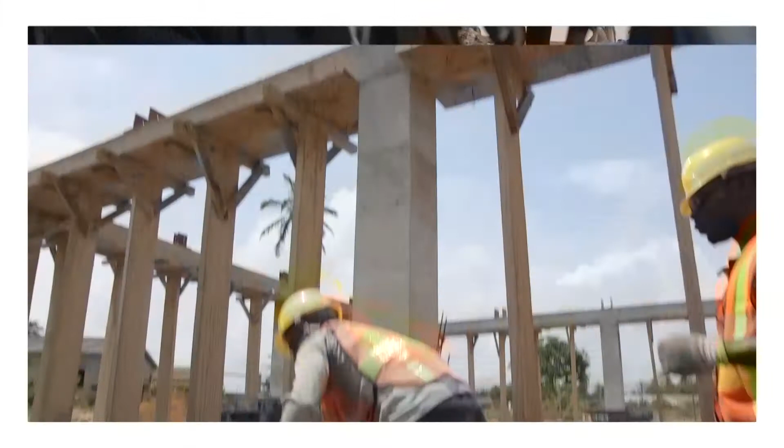The community-based approach does not end when construction finishes. The last stage, maintaining a safer school, is ongoing. Previous stages of safer school construction included participation and training opportunities with the community. Often, this community engagement leads to the community changing its views on hazards and committing to building safer schools.

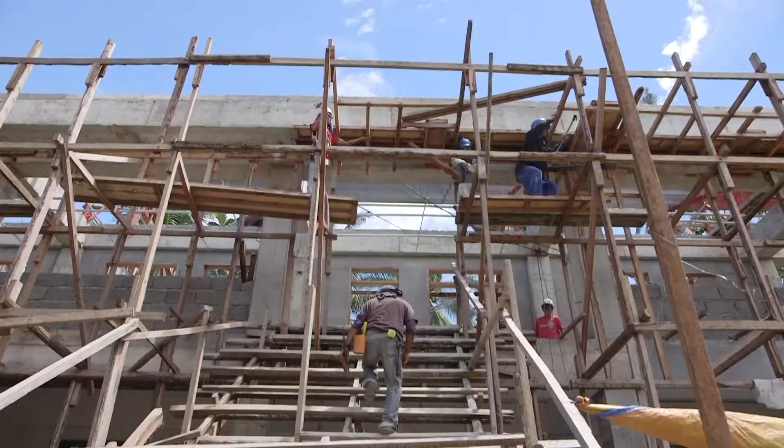Stage 5 is where this changing view on hazards and safety spreads to other parts of school life and community. When the community learns about hazards and works together to remove unsafe conditions, and when the community values safety as a goal for their children and for themselves, they begin to create a culture of safety. With support from the program manager, the community grows this culture of safety even after school construction ends.

They do this by maintaining the school, applying a safety culture to other parts of their lives, and passing on lessons learned to future generations. If implemented well, Stage 5 has the biggest long-term impact. There are 3 steps in the maintenance stage.

Step 1, develop a school use manual and maintenance plan. Step 2, celebrate completion and integrate safety. Step 3, promote broader responsibility. These steps make sure safer school construction becomes the norm. They ensure the community continues to learn from hazards and reduce their risk. Step 1, develop school use manual and maintenance plan.

As construction finishes, the program manager and school management committee focus on the safe use and maintenance of the school. They first work with the design team to write a user manual, a document that lists how the school can and cannot be used safely. Government policies may require particular safe uses of the school, so government agencies may help write the manual.

Perhaps the school is designed to be a temporary community shelter during disasters. This is written down in the user manual. If the school foundation is only strong enough to support 2 stories, this is also written down. The school management committee needs to know what changes they can safely make without seeking approval.

Changes such as painting, replacing windows, or planting vegetation may all be acceptable, but other changes, like adding doors or removing columns, might weaken the school building. These changes need approval from an engineer. The school management committee needs to know this before the school is handed over to the community.

All these permitted uses and changes, along with those that are not, are included in the use manual. The final design drawings are also included. But that is not all. A safer school needs a maintenance plan. The program manager helps school staff and the committee to understand that maintenance keeps schools functional and safe.

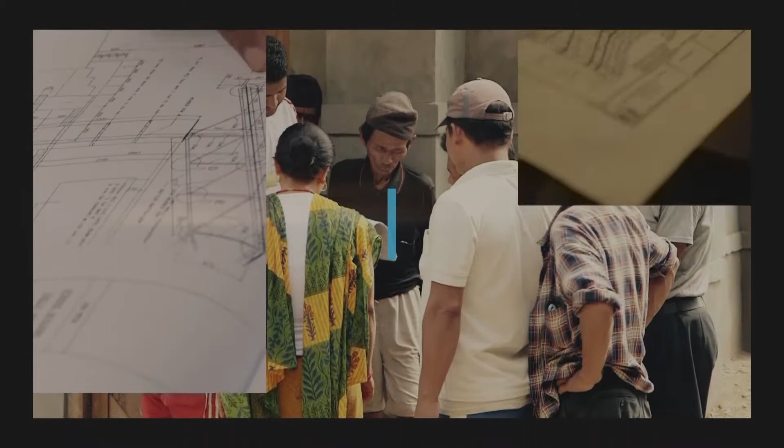A maintenance plan can include a number of helpful tools. A maintenance schedule includes a timetable of when jobs need to be done on the school building and grounds. A maintenance checklist helps school staff remember what they need to do and who is responsible for each task. Part of a good maintenance plan is the budget, working out how to pay for each task.

Generally, the government agency or organisation in charge of managing the school is responsible for funding this maintenance work, but sometimes there is not enough money. A school management committee can find creative ways to boost limited funds.

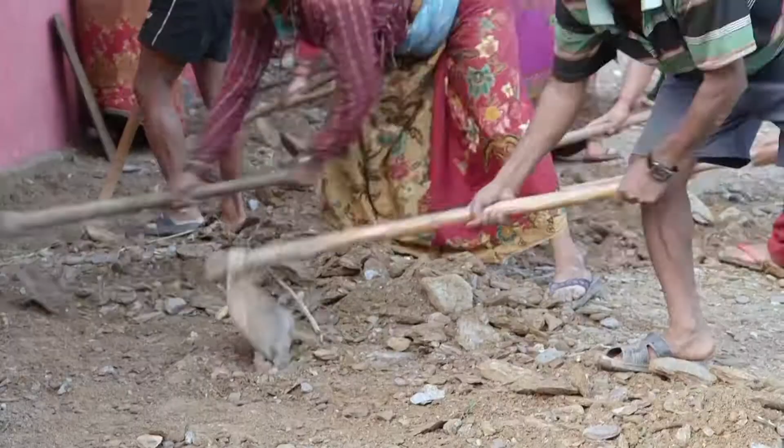Some schools have regular safe school days. These are when everyone, parents, students, staff, donate time and skills to maintain the school. World Disaster Risk Reduction Day on October 13 might be a good date to choose. The community may also have regular community work days. When funds are limited, the School Management Committee may ask parents and older students to help raise money for maintenance.

Building a safer school takes a lot of hard work and time. Proper care and use of the building will ensure the next disaster does not destroy what the community has created. The next step of the maintain stage is step 2, celebrate completion and integrate safety.

Completing a safer school project is a big achievement for any community. While the safer school building itself is significant, so too is the community's new knowledge and skills and its emerging culture of safety. The community has become a partner in protecting their children. It should be celebrated. This celebration highlights how the community made safety-conscious choices when selecting their site, designing their school, and constructing it. The celebration is also a public commitment to maintain the school building and integrate safety into all parts of their lives.

Once students begin classes, it is important these lessons of safety are immediately put to practice. Staff and students need to manage their school so everyone remains safe during disasters. Even when a school building is safe, its fittings and educational tools can be damaged or even injure or kill students and staff during a disaster.

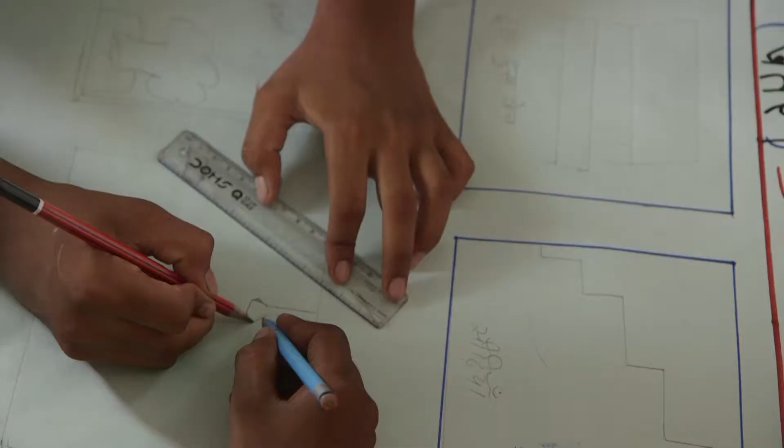Lastly, students, staff, parents, and the community continue to learn about disasters and school safety. Information about hazards, safer construction techniques, and school safety procedures all become part of the school culture and even the curriculum. This can even be fun. Classes can create plays on how to reduce disaster risk to perform to their families and fellow students.

Parent meetings each year can explain emergency procedures and also point out again the safety features of the school. Learning about a culture of safety can even change the curriculum or be used as supplementary material. In science classes, students can learn about hazards in their region. In history class, students may want to interview their elders about historic disasters.

In social studies classes, students may play games to learn ways their families and their communities protect themselves from hazards like floods, high winds, earthquakes, and now climate change.

The last step in the maintain stage is step 3, promote broader responsibility. This step is no longer about the community where a safer school is built. It is about broader changes to the way regions, countries, ministries of education, and development organisations operate. It is about all of us.

The imperative for school safety speaks for itself in terms of the contribution of education to a country, any country for that matter, not just the Philippines. Because the future of the country lies in its people, in the development of its people. We're not just talking about life-saving.

Education is life-saving in the sense that we're talking about saving lives, the mortal life. If you know what to do, of course, then you don't die, you survive, you don't get injured. No, school safety is not only talking about that. School safety is talking about safeguarding the role of education in terms of life-saving purpose, which also means human development purpose, life in terms of human development.

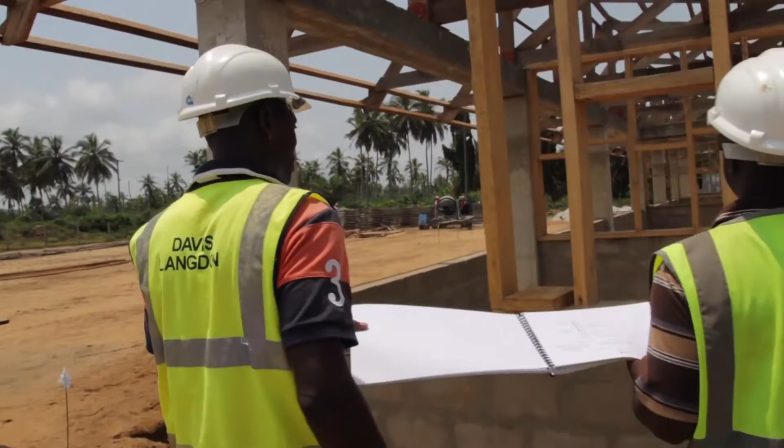Budgetary constraints can never be an excuse for putting children in schools that can hurt or kill them. Where funding bodies resist the small increase in cost or effort needed to build safer schools, we need to advocate for children and educate those funding bodies. Finally, we all need to learn from each other. When safer school projects are successful, when they result in safer school buildings and more resilient communities, the successes and challenges need to be shared.

This last stage of safer school construction, stage 5, maintain, starts when construction comes to an end. In this stage, the program manager, design team, and school management committee develop a use manual and maintenance plan. They celebrate the completion of the school, and the school staff and students integrate safety into their practices. But their work continues long after the safer school is finished. Everyone continues to promote broader responsibility for the safety of their school, but also for all schools and all children.

Over this century alone, countless children have died in the very buildings meant to educate and keep them safe. Untold communities have lost their investments when disasters destroyed their schools. We have the knowledge and skills. Now we need to change the process. Together, we can make sure every child has access to not just a school, but a safe school. And by taking a community-based approach, safer school projects can help make sure that when children leave their schools, they return to resilient homes and communities.